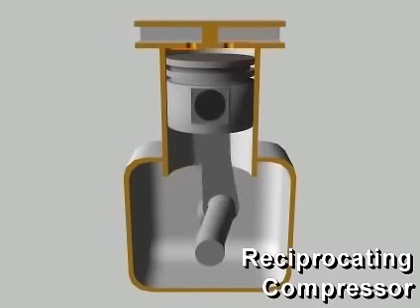A reciprocating compressor compresses refrigerant vapor in a cylinder using a piston. In a way, reciprocating compressors are like automobile engines. The pistons are directly driven through a wrist pin and connecting rod from a crankshaft.

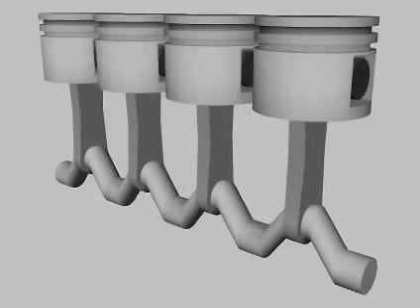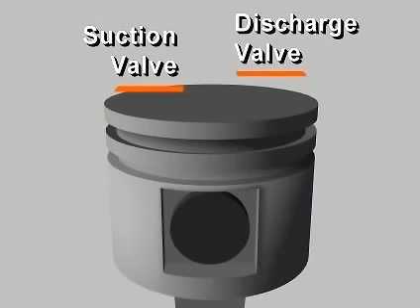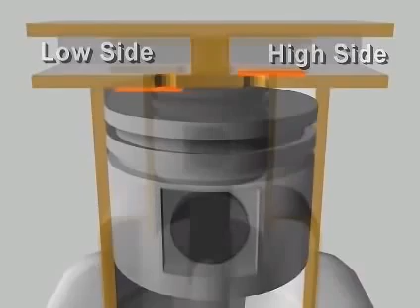Depending on their size, reciprocating compressors may have one or more cylinders. Multiple cylinders may be arranged in line, opposed, or in a V. In each cylinder, reciprocating compressors have both a suction valve and a discharge valve. These valves give the compressor its ability to pump refrigerant vapor against a pressure difference. They are usually located in the head of the cylinder, in passages connected to the high or low pressure side of the system.

Let's follow the compression process in a single-cylinder reciprocating compressor during one complete revolution of the crankshaft. Starting with the piston at the top of its stroke, or at top dead center, the piston begins to move downward as the crankshaft rotates. Because both valves are closed, the downward moving piston reduces the pressure in the cylinder.

As the pressure in the cylinder falls below the low side pressure in the suction line, the pressure difference opens the suction valve, letting refrigerant vapor flow into the cylinder. The piston continues down and pulls in more vapor until the cylinder is filled with low-pressure vapor at the bottom of its stroke. Once past bottom dead center, the piston begins its upward stroke.

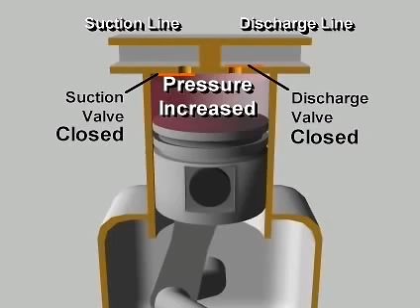The suction valve closes. As the piston moves up, it reduces the volume of the space in the cylinder, increasing the pressure of the vapor. When the pressure in the cylinder exceeds the high side pressure in the discharge line, the pressure difference pushes the discharge valve open, letting the compressed vapor flow out of the cylinder.

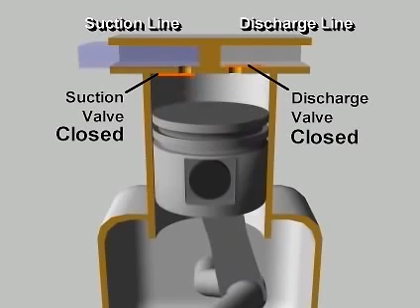This continues until the piston reaches the top of its stroke and most of the compressed vapor has been expelled into the discharge line. When the piston begins its downward stroke, the discharge valve closes. The complete cycle then repeats during each revolution of the crankshaft. This is the mechanical positive displacement vapor compression cycle using a reciprocating compressor.